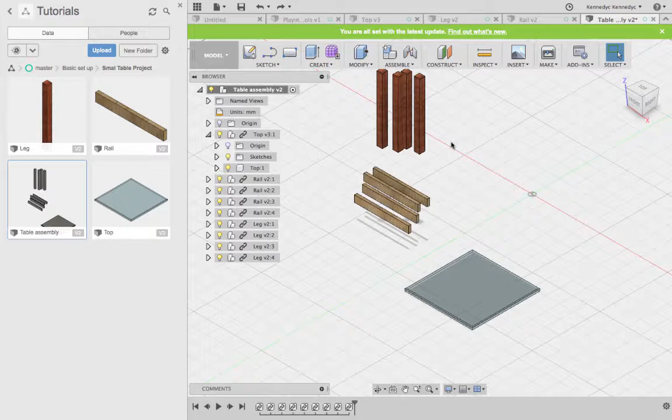Now that you've changed the physical material to that which suits your design, and we've got all of those parts in there, we now need to join them or assemble them. So we go to the Assemble menu here. We're going to choose this one, Joint, or you can hit J on the keyboard as a shortcut for joint.

What you need to do now is specify which surfaces you'd like to join. And you'll notice what we need to do is select the correct surface. As I toggle around that, it's selecting this face and this face. We want to actually join this surface to the underside of the table.

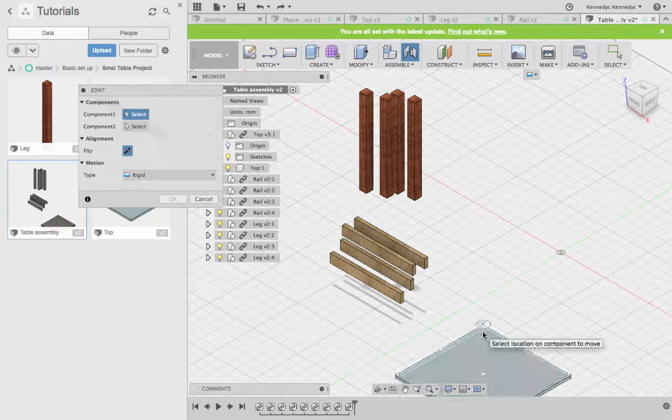Now, just before we do that, I might actually just cancel that. I need to ground one of these objects so we know which one's going to be locked into place. So let's lock the tabletop into place, this one here. If I click on that and highlight it, you'll notice that this has a little blue stripe on it. That's saying that that's the item that's selected.

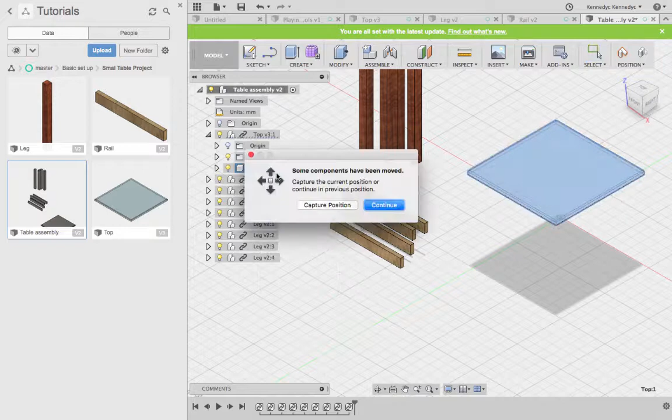If I click on a leg, you'll see the legs are selected. Which one in particular? This particular body here. This one here is this leg. So we want to select the top, and I want to ground that. Capture position, and now I can't actually click and drag that around anymore.

That's grounded, anchored there if you will, or like the little symbol down in my timeline here suggests, a pin. It's pinned to the ground there. What I can now do is hit J for joint and select which components I want to join. The more you zoom in, the more accuracy you'll get here.

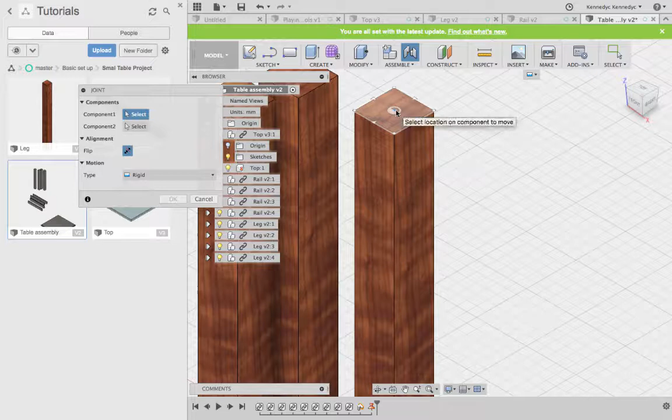And what you'll notice is we want to make sure that this top surface is selected. Please make sure the edge isn't selected, or this edge, or this surface. It needs to be this end grain of the leg. And let's say we join this one to this corner. What we'll need to do is pick this point here.

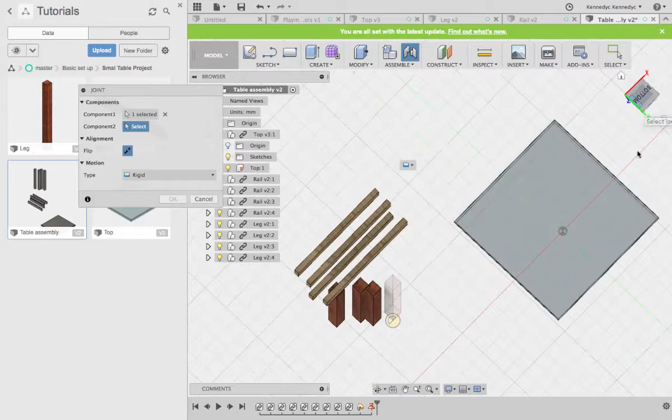We need to flip that upside down. Again, zoom in if you need to. Shade the bottom and pick that point there. Click, and that will drag into position there. Now you notice I've still got that offset there. Should be starting off for you guys as 0.

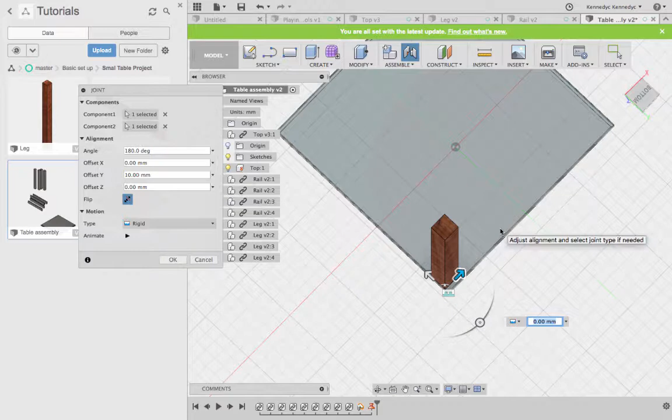And if I click on my bottom view there, I don't actually want it to sit in the corner. Yours should appear in the corner to begin with. We want to have it 10 millimeters in. So click on that arrow and change it to 10 mil. Click on this arrow. Okay, in this direction we want it to come 10 millimeters in, and hit enter.

Now, if like mine, yours disappears a little bit there, I'm not sure exactly why that's doing that, but if we click on the component you want to join and you try to drag it, it will connect that joint there. So you might need to do that to each of your legs. That's one of them. You're going to go through and do the same thing to the rest of them. I'll show you one more.

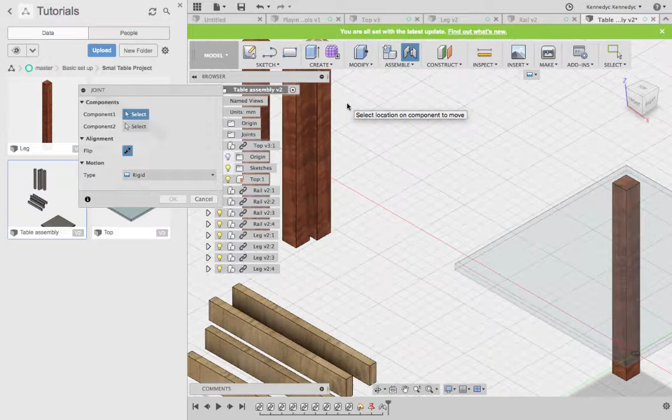J for joint. Let's choose this leg, and we want to move it to this corner here. Zoom in. Highlight it, that point there. To connect to this corner, we're going to roll that upside down, pick that point there, click on our bottom view, and you'll notice that because I put those preferences in before, 10 mil in and 10 mil across, they have remained, and so that's sitting in there, which I'm happy with.

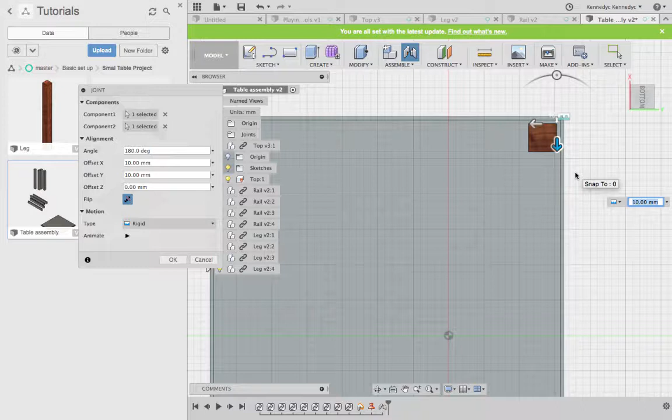I'll just double check that this one is also 10 mil, and it is. Click enter, or I'll come over here and click OK. You'll notice the leg takes off for whatever reason. I'm going to come and click and drag it, and it moves into position there. I'll pause this while I do the other two.

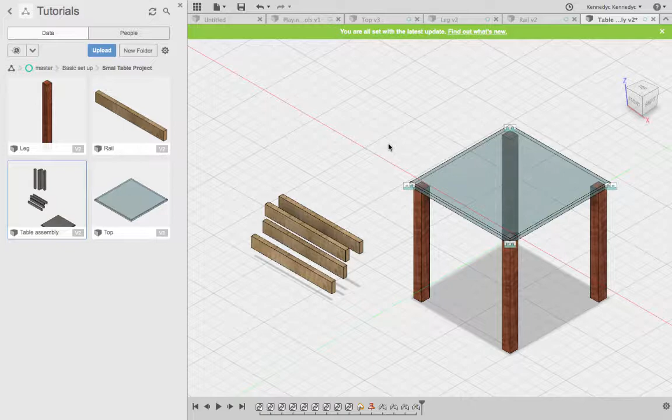Alright, just joined those other legs and you can see they're sitting in position. If I have a look at my bottom view, you'll see those all sitting in there quite neatly now.